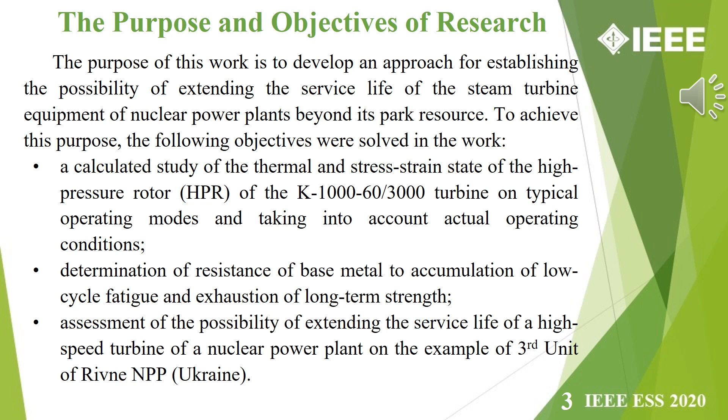Research on the residual service life of energy equipment is usually performed for its most highly loaded parts. The most intensely loaded areas of high-speed steam turbines are their rotating elements. So the object of research in this work is the high-pressure rotor, since it is made of expensive high-alloy steel, 30 chromium, nickel 3, molybdenum 1, vanadium, and operates at the highest temperatures and pressures.

The main forces affecting the stress-strain state of the rotor are stresses from temperature expansions, irregularities of temperature fields, centrifugal forces, and stresses from the steam pressure. So this photo shows the K1000 turbine at the installation stage. In the center we can see a high-pressure cylinder, and symmetrical on both sides of it are low-pressure cylinders.

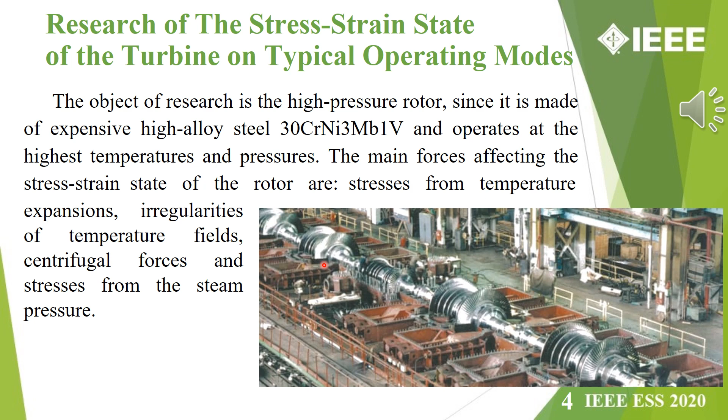In order to assess the level of stresses of the steam rotor for typical operating conditions, it is necessary to study its thermal state. For this, the conditions of thermal conductivity are studied in a stationary and non-stationary setting for constant and basic variable operating modes. Here is the dependence for calculating the thermal conductivity in the metal of the rotor.

A convenient method for solving this kind of mathematical physics problems is to discretize the object of calculation using the finite element method. For complex designs of a high-pressure rotor, the geometric model is built in the three-dimensional mode, with account of the main elements, such as turbine stage disks, diaphragm seals, front-end seals, blade lock mounting,

discharge openings, and others. The model is built using the specification drawing of the K1000 turbine, and since the high-pressure rotor is symmetrical, to simplify the solution of the heat conduction tasks, it was decided to consider only half of the rotor from the steam inlet to the last chamber of the end seals. So the research model includes areas which usually have maximum temperature gradients and stress intensities.

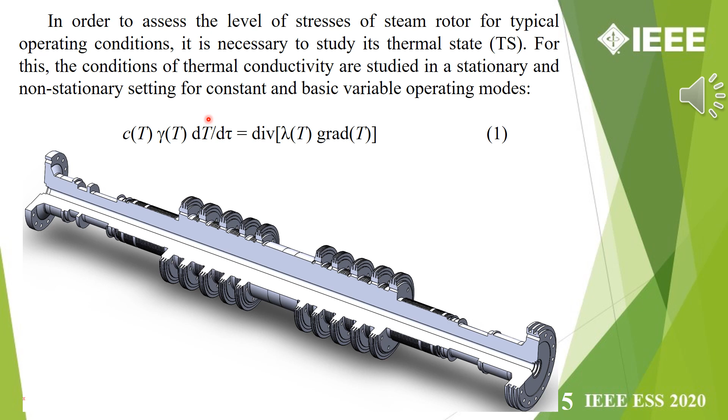In solving the problem of thermal conductivity, the boundary conditions of heat exchange were set in all typical areas calculated by the authors earlier. Based on the calculation of the basic thermo- and hydrodynamic parameters of the flow part for normal and transient operating modes, the values of temperatures, heat transfer coefficients, and heat flux density were determined for all surfaces of the geometric model. More details about calculations of boundary conditions are mentioned in this paper.

So, here is presented an example of the calculation of the thermal state of a turbine rotor at an electric load of 1000 megawatts. As we can see, the metal temperature decreases evenly from 270 Celsius degrees in the first stage to 166 Celsius degrees in the fifth stage. The temperature level in the area of the front end seals is 83 to 145 Celsius degrees.

The stress-strain state was estimated in an elastic-plastic formulation. The highest level of stress intensity is observed in the area of the axial opening of the turbine and amounts to 158 megapascals. This is due to the fact that when the transients are over and the temperature field of the turbine is stabilized, the main tensile force of the rotor is exerted by the centrifugal force. Moreover, more massive stages are loaded with higher forces. Quite high stresses are also observed in the area of discharge openings and fillets of all 5 stages.

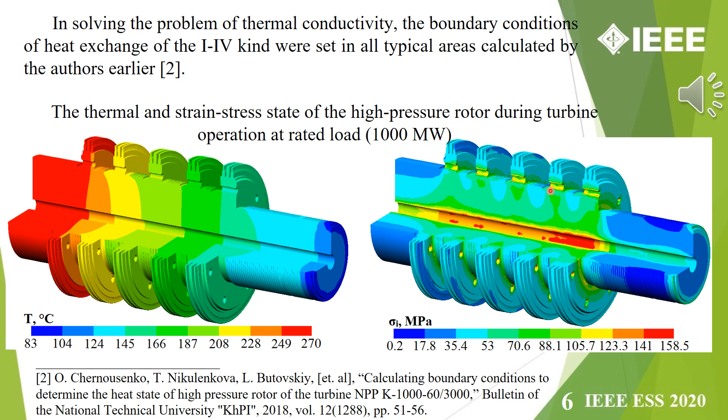In the computational study of the thermal state of the rotor in variable modes of operation, of great interest is the dynamics of changes in the unevenness of the temperature field. The jumps in temperature gradients make it possible to establish time instants at which heat shocks affect the metal. Accordingly, at these moments of time, the effects of the unevenness of the temperature field are the largest.

So in this figure we can see the dynamics of variation of irregularity of the rotor temperature field at startup from the hot state of metal, which means that at the beginning of the startup, the temperature of the metal of the first stage is nearly 150 Celsius degrees. Maximum values of the temperature gradient are observed at the rotor push, estimated time 800 seconds, for the blade lock mounting of the first stage.

The value of this temperature gradient is close to 1600 Kelvin per meter, and the following local maximums of the temperature gradients are observed at the time point of 3200 seconds, which means 400 megawatts of electrical power, and at the end of startup mode at the time point of 14,000 seconds, with a power output of 1000 megawatts. Also, a significant temperature gradient is observed throughout the hot startup at the front fillet of the first stage. With the end of the startup mode, the values of the temperature gradients decrease in all studied areas.

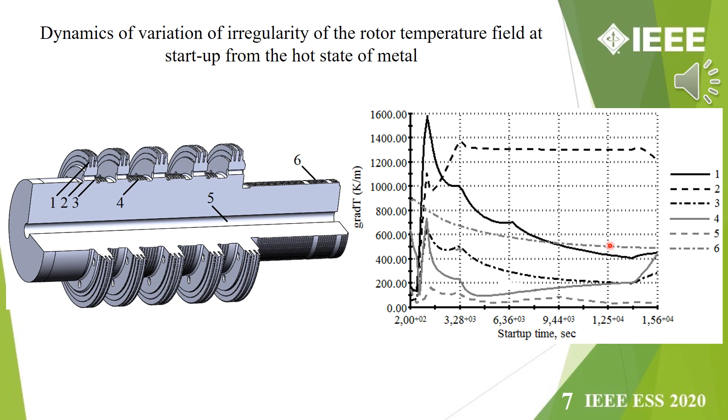When assessing the resistance of the base metal to the accumulation of low cycle fatigue, it is necessary to have information about the change in stress intensity over the cycle. When starting from a hot state of metal, the highest values of stresses, 207 megapascals, are observed at the axial opening of the turbine, at the time of 6,600 seconds, when the turbine is held at 750 megawatt capacity. The highest compression stresses, minus 182 megapascals, are observed at the front fillet of the first stage at the time of 3200 seconds. At this moment, the turbine is ramped up to 400 megawatts.

At the end of the startup period, the intensity of stresses in all examined regions gradually decreases to the values corresponding to the nominal operation mode, which we saw on the diagram earlier. Similar data were obtained for all other typical operating modes of the steam turbine type K-1000, and the results of numerical research of thermal and stress-strain states of the high pressure rotor are presented in these works.

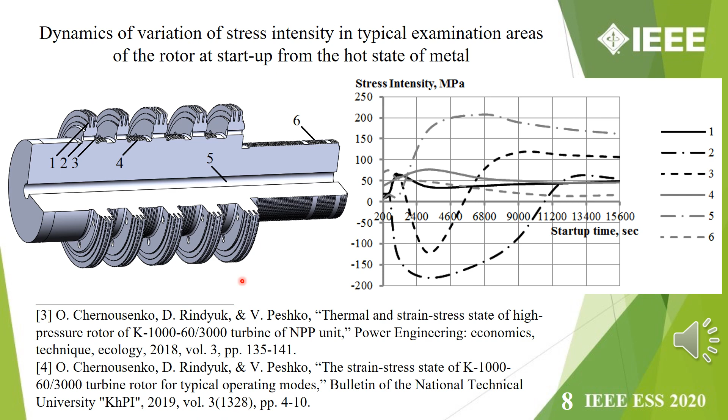Let's talk now about the research of resource indicators. A comprehensive scheme for calculating the resource indicators of rotors of steam turbines of thermal power plants is described in this work. Such studies provide for the implementation of calculations in accordance with some regulatory documents like this one.

Thus, the permissible number of startups from various thermal states is estimated using experimental low cycle fatigue curves, and the strain intensity amplitude reduced to a symmetrical loading cycle and other parameters.

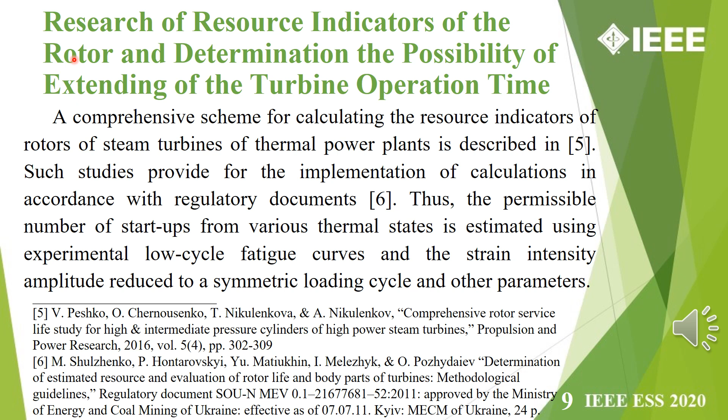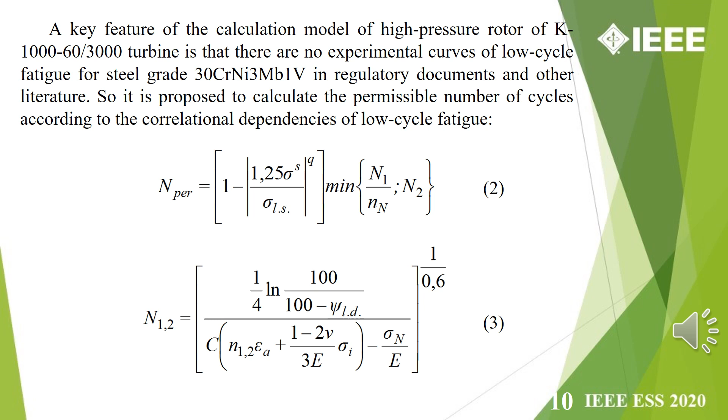A key feature of the calculation model of the high-pressure rotor of the K1000 turbine is that there are no experimental curves of low cycle fatigue for steel grade 30CrNi3Mb1V in regulatory documents or other literature. So, it is proposed to calculate the permissible number of cycles according to the correlational dependencies of low cycle fatigue, which you can see on this slide. A model for estimating low cycle fatigue indicators using correlational dependencies is presented in detail in this paper.

The studies carried out made it possible to establish the degree of resistance of the turbine base metal to the accumulation of low cycle fatigue and the exhaustion of long-term strength. To calculate the resource indicators and determine the possibility of extension of the operating time, it is proposed to consider a high-speed turbine of the third unit of Rivne nuclear power plant. This power unit was commissioned in 1986. As of October 2019, its operating time is 216,000 hours, with a total number of launches of 271.

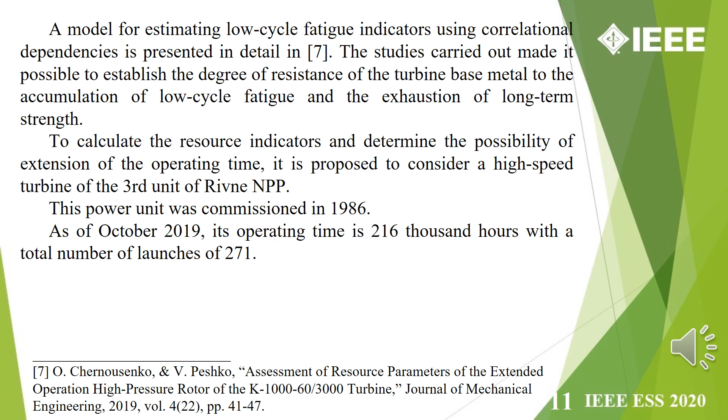In the second case, the permissible operating time of the metal was determined by the experimental curves of long-term strength, according to a regulatory document. This value is determined by the maximum stress intensity at the rated operating mode for the long-term strength curve, which corresponds to a 99% non-fracture probability. In this case, the residual service life of the high-pressure rotor is 26,000 hours.

The study made it possible to establish that the accumulation of low cycle fatigue is not the dominant mechanism of damage for the base metal. This is due to the fact that the power units of nuclear power plants operate in the base part of the schedule of electrical loads, and they rarely operate in variable modes. In this case, the starting modes themselves take a long time, allowing uniform heating of the rotor, which leads to a decrease in the amplitudes of the strain intensity and also increases the permissible number of startup cycles.

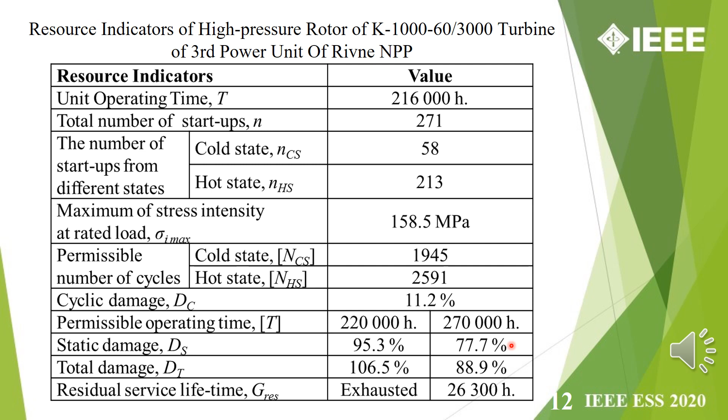And finally, let's highlight the main conclusions of the research. After the estimated resource of nuclear power units has been exhausted, along with the calculations to justify the possibility of extending the operation of reactors, similar calculations should be made for turbine equipment. A model for determining the resource indicators of the rotors of high-speed turbines of nuclear power plants is presented. It includes a calculation study of thermal and stress-strain state for the most typical operating conditions.

In the course of the research, it was found that at the nominal operating mode, the highest stresses arise in the area of the axial opening, as well as in the fillets and discharge openings of the turbine stages. In variable operating modes, the amplitude of the stress intensity does not reach high values in the studied areas. The accumulated low cycle fatigue in the base metal is 11% and static damage is 78%. The residual service life of the high-pressure rotor of the K1000 turbine of the third power unit of the Rivne nuclear power plant is 26,000 hours, which allows extending the operation time of the turbine until the next preventive maintenance.